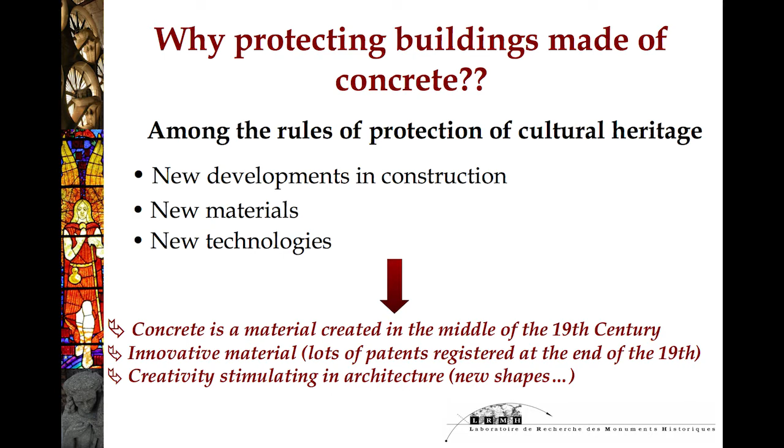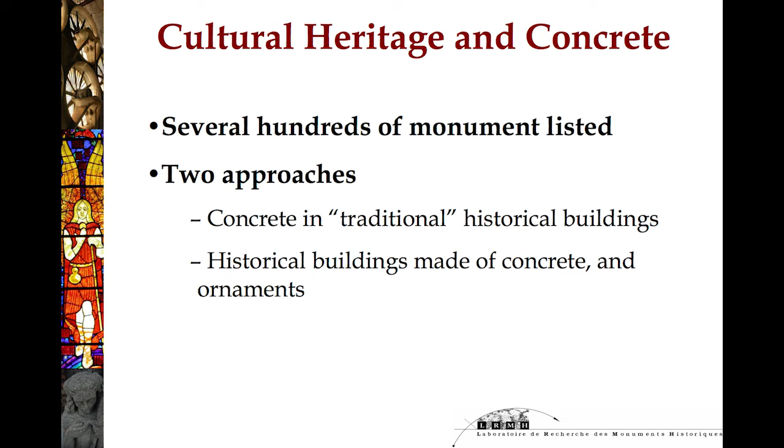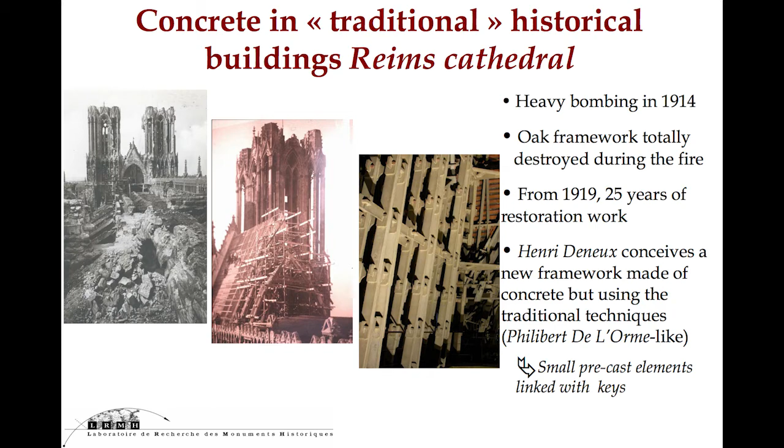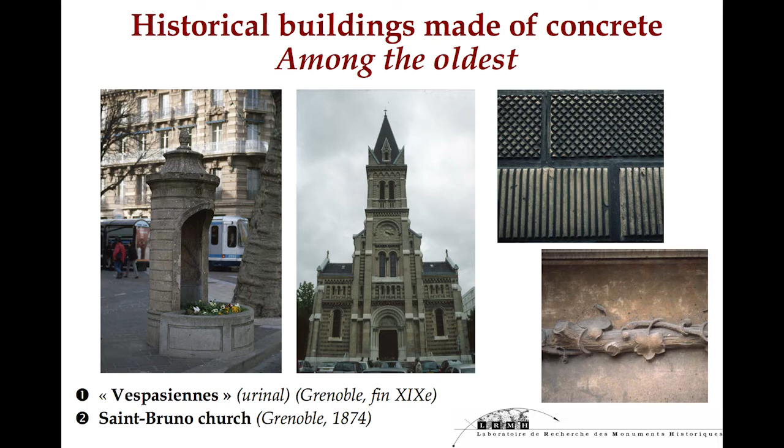Concerning historical buildings made of concrete, among the oldest are many examples in the Rhône-Alpes region, but this concrete is in fact without reinforcement. It's cast stone made of natural cement, so without reinforcement. We can see here an example with a repetitive geometrical motif, where natural cement was used to mold ornaments like flowers and branches. A funny example is the Vespasienne, urinals in Grenoble, made with cast stone.

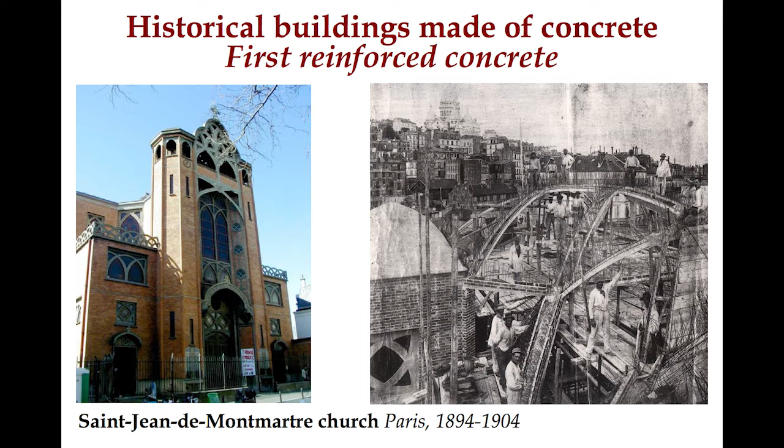The first reinforced concrete: you can see here a picture of the construction of Saint-Jean-de-Montmartre Church, near the Sacré-Cœur in Paris. The building system used here, in France, is called coffrage perdu, or lost formwork, in bricks. You can see here the formworks in bricks. The brick formwork is kept after the hardening of the concrete, so the brick formwork is always present in the building.

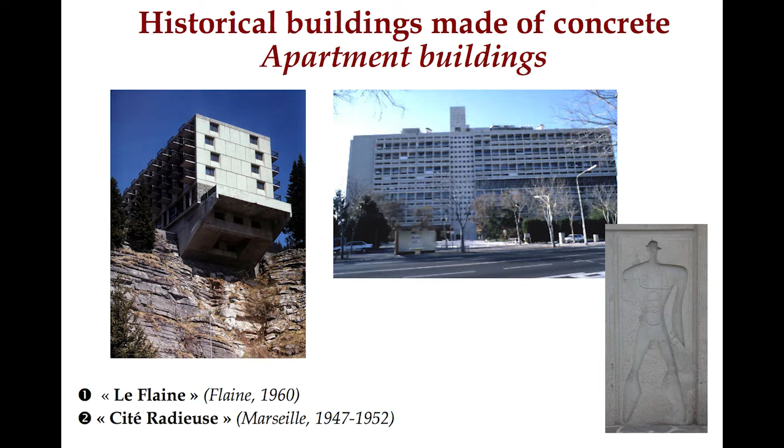Concerning historical buildings made of concrete, there are many types. There are apartment buildings - you can see two examples here with Le Flaine, the ski station in the Alps mountains, and the famous Cité Radieuse in Marseille by Le Corbusier.

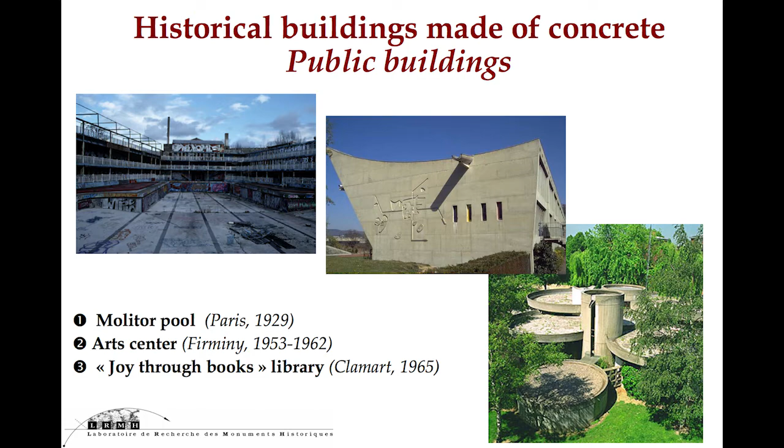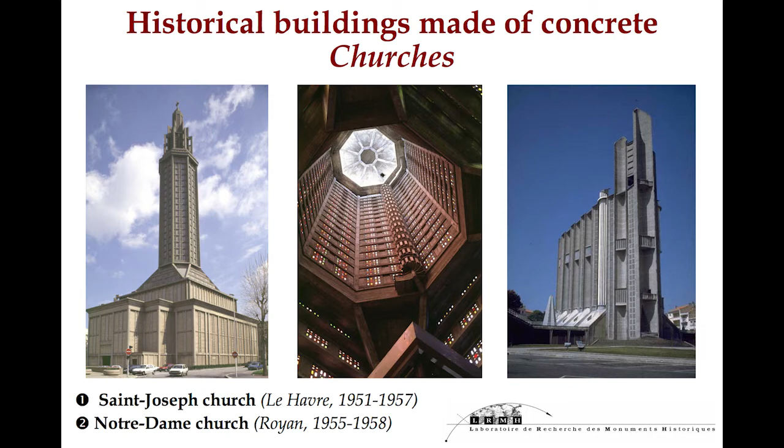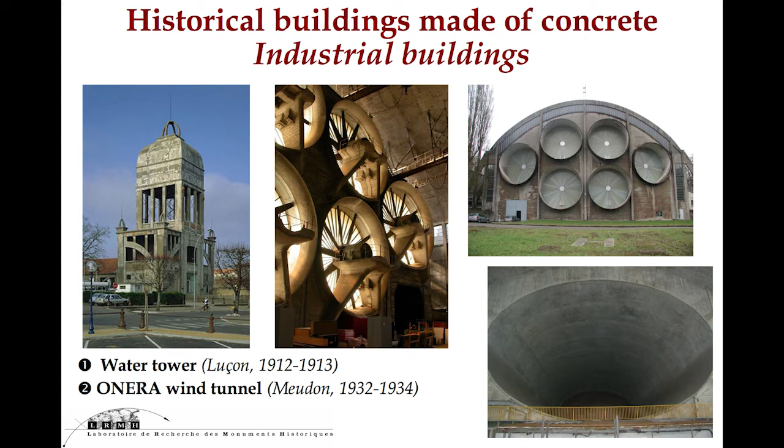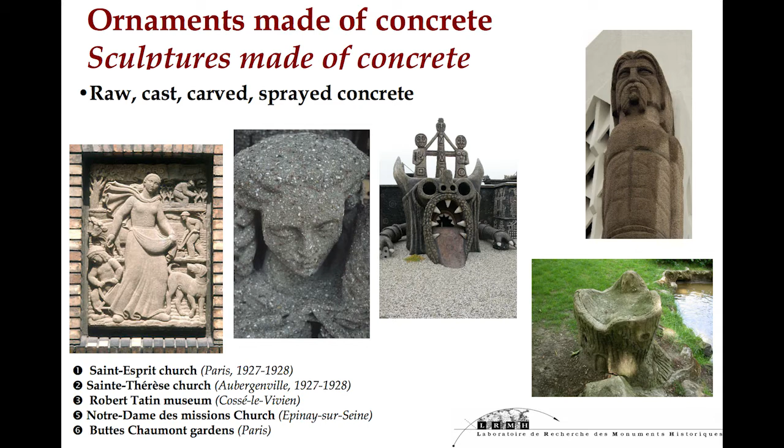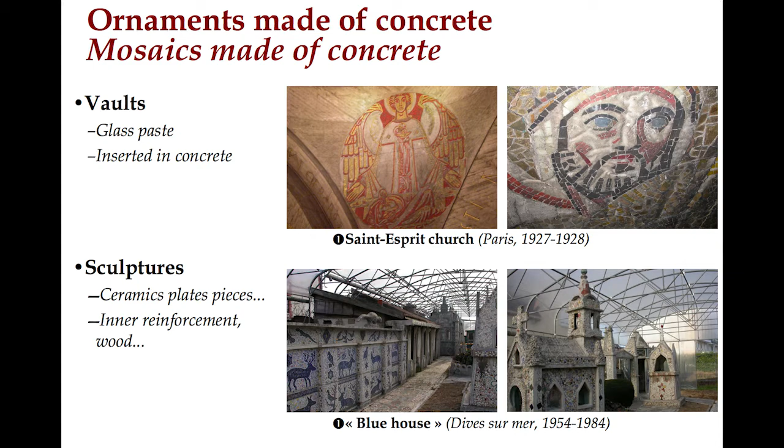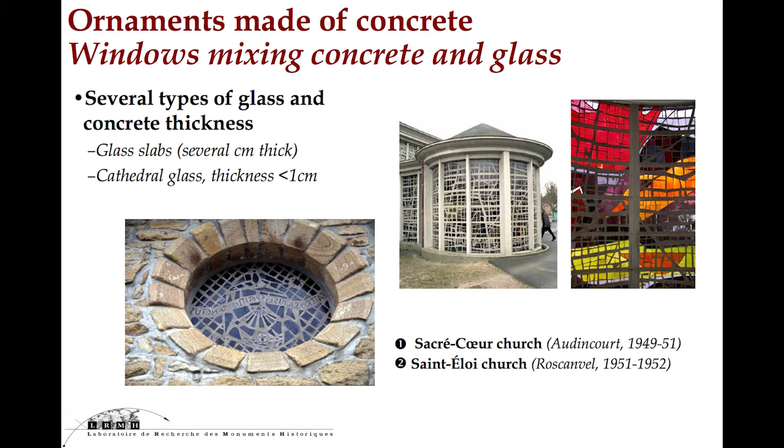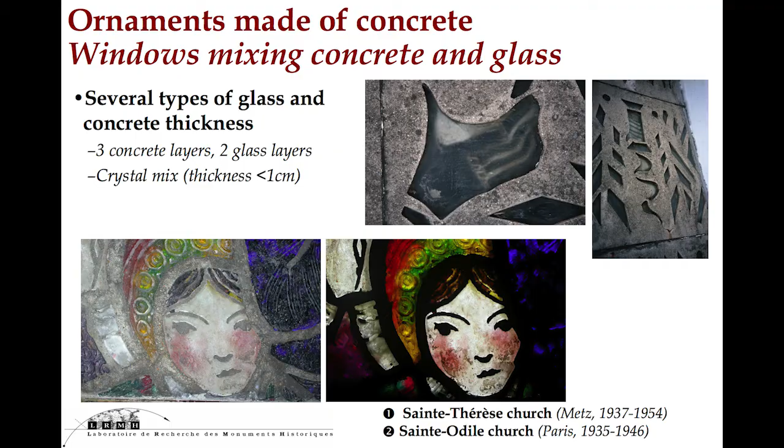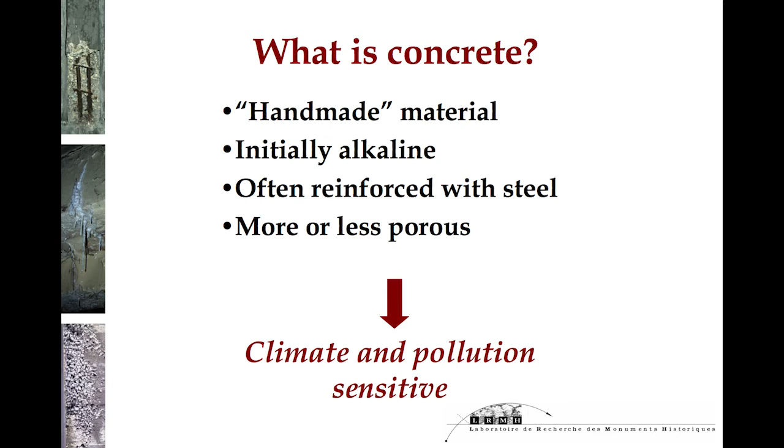So let's talk about the main decay mechanisms identified on this site. First, what is concrete? It's a handmade material which is initially alkaline. It is often reinforced with steel, and it is more or less porous. So concrete is climate and pollution sensitive.

The decay's origins are mainly the composition and casting, the lack of maintenance, the natural aging, and the aggressive environment. Concerning these last two, natural aging and aggressive environment, there are six main mechanisms: erosion and leaching, carbonation, chloride-induced corrosion, sulfate reaction, freeze-thaw sensitivity, and alkali aggregate reaction.

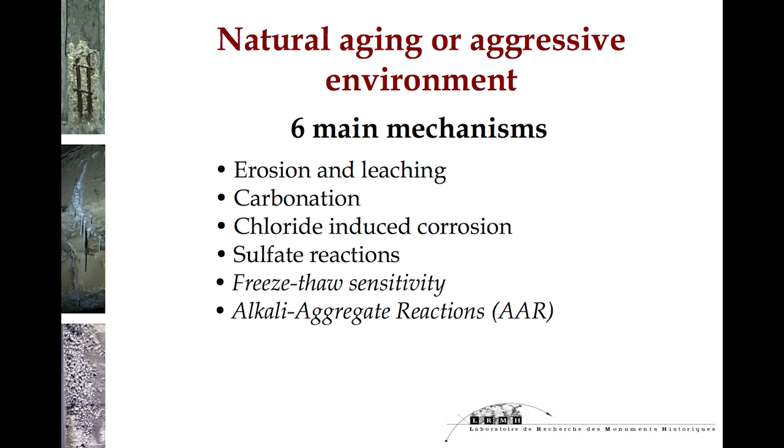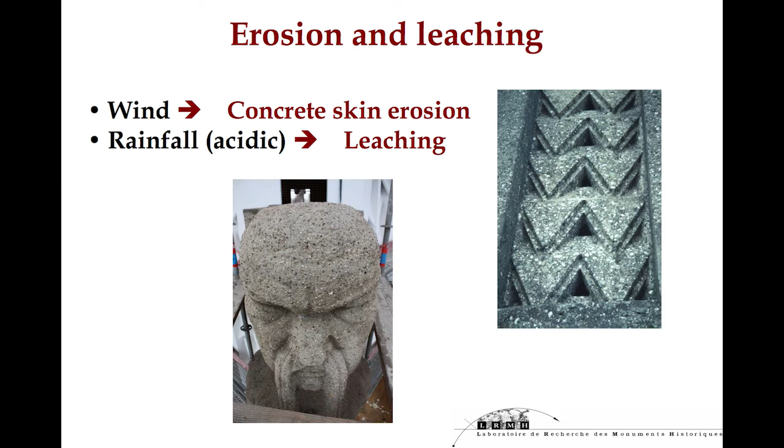I'm going to present you the first mechanism. Concerning erosion and leaching, the wind leads to concrete skin erosion, and the rainfall, which can be acidic, can lead to a leaching of the concrete skin. As you can see in this picture, the concrete skin is removed, and we can see now the aggregate.

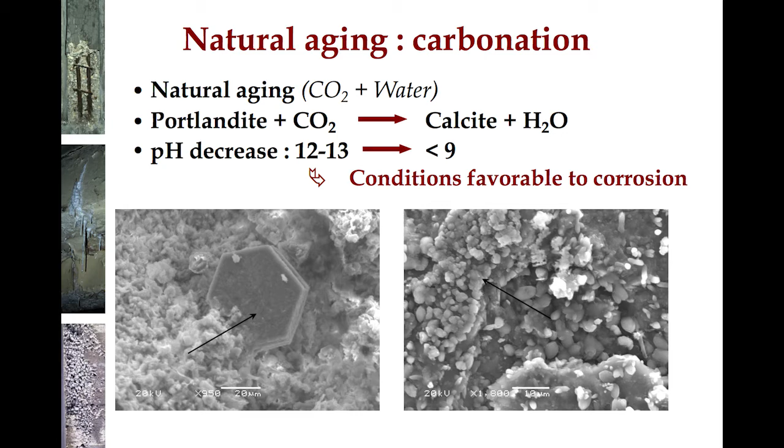During this reaction, we have a pH decrease from 12-13 to a pH value lower than 9, and these conditions are favorable to corrosion. So carbonation leads to generalized corrosion. It depends on the rebar's position in relation to the carbonation front, and the CO2 diffusion follows the first law of Fick's flow, according to time. In terms of decay, we observe concrete heaving, scaling, and spalling.

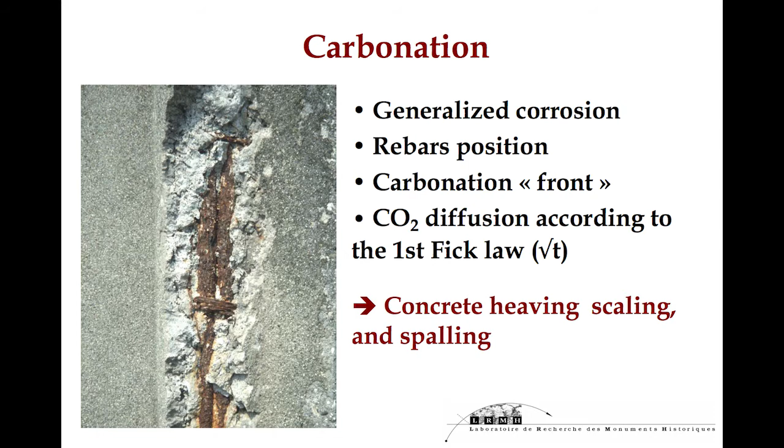Concerning chloride-induced corrosion, there are many chloride sources: chloride-containing admixtures, seawater with sea sprays, de-icing salts, and household waste incinerators. When free chlorides reach the rebars, there is an increase of standard corrosion. Chlorides are a catalyst for standard corrosion, and when there is a high concentration of free chloride, the passive layer of the steel is attacked, causing pitting. So the main decays are concrete heaving, scaling, and spalling, and there are specific rust stains.

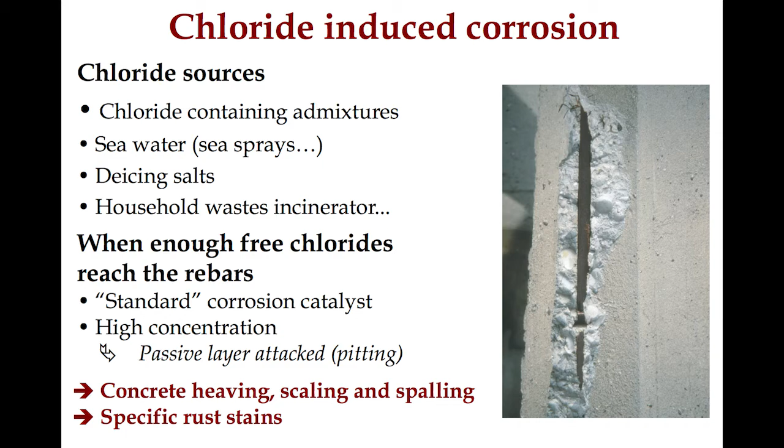Now the sulfate reaction - there are two sulfate reactions. The first is the formation of black dirt deposits. The calcite, given by carbonation, reacts with sulfate in air to give gypsum. Gypsum is white. The gypsum reacts with aeolian particles, which are black, to give black dirt deposit. You can see here gypsum crystal and fly ash particle.

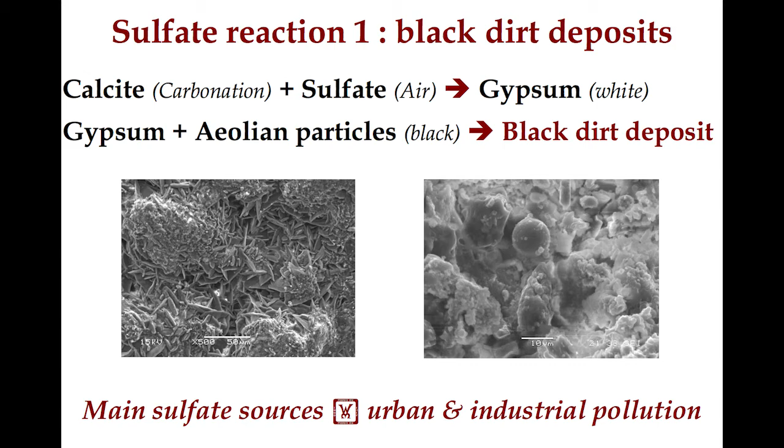The main sulfate sources are urban and industrial pollution. The second sulfate reaction is the formation of secondary ettringite. Aluminate-enriched concrete plus high sulfate contents give the formation of secondary ettringite.

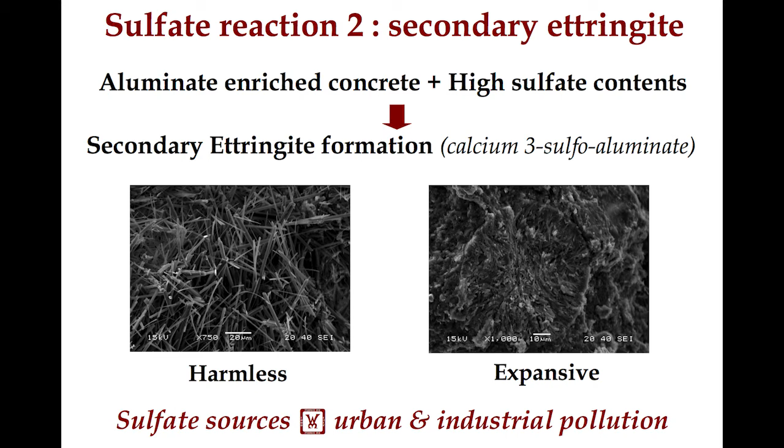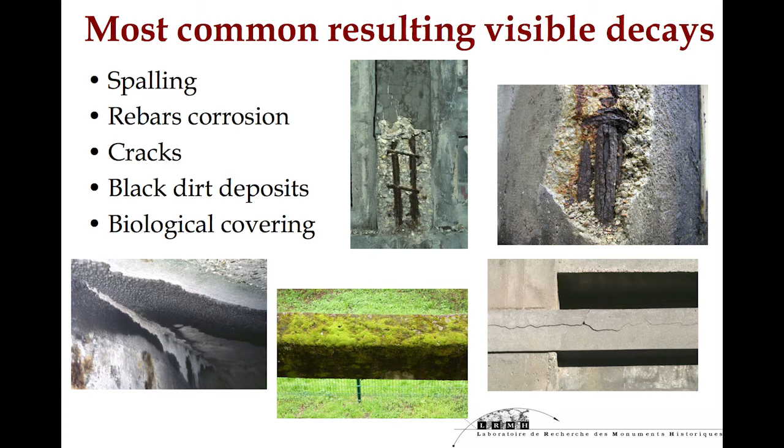So we can sum up the most common resulting visible decay: spalling, rebar corrosion, cracks, black dirt deposits, and biological covering. You can recognize these in these pictures.

I'm going to present to you now the LRMH research axes based on these observations. Concerning diagnosis and corrosion diagnosis, we perform many internal, national, and European projects to work on electrochemical techniques, for example, to measure corrosion speed and resistivity. We worked on acoustic emissions to detect corrosion, and we worked too with techniques to measure moisture content.

Concerning ancient cement identification, we performed internal and European projects, and we developed a specific protocol to identify ancient cements, particularly natural cements.

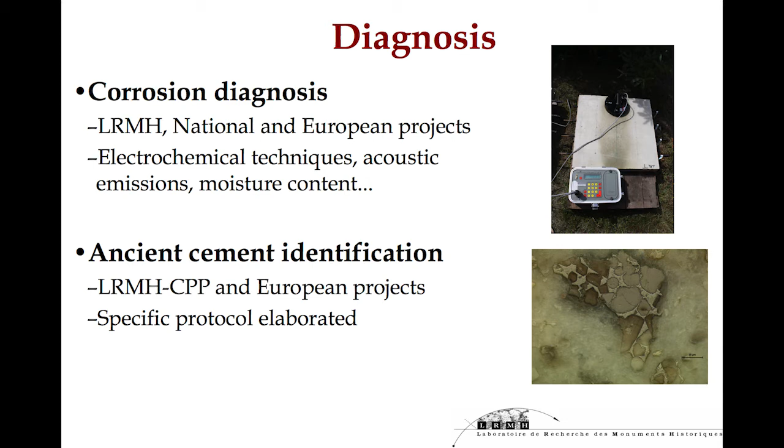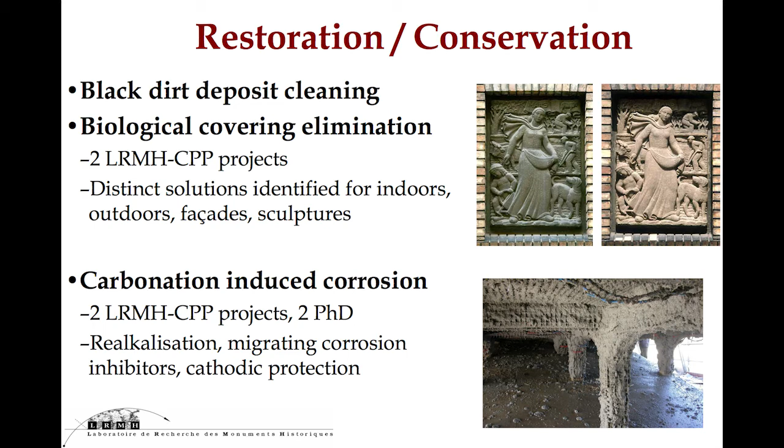Concerning carbonation-induced corrosion, we performed projects on realkalization, migrating corrosion inhibitors, and cathodic protection. For chloride-induced corrosion, we are going to start a PhD with Laboratoire Central des Ponts et Chaussées in France for the electrochemical extraction of free chlorides. And for erosion and leaching, we're going to start an internal project on biological consolidation and chemical consolidation.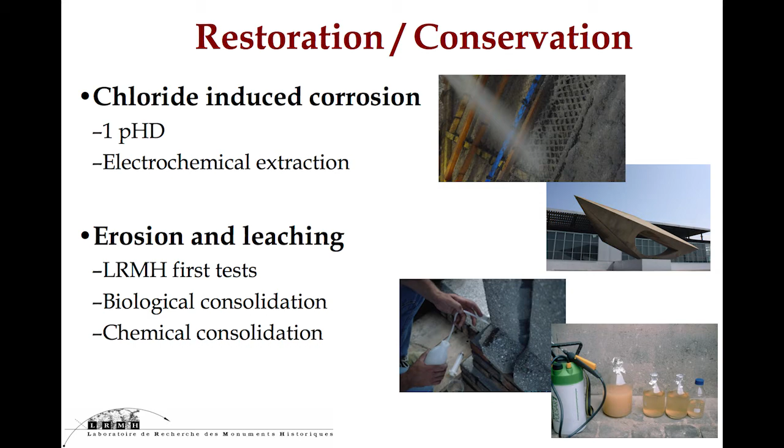I'm going to present the restoration strategies and examples. The restoration strategy has 3 steps: first, diagnosis with a six-step protocol elaborated; second, cleaning black dirt deposits and biological covering; and third, specific treatments like corrosion treatments or patch repairs.

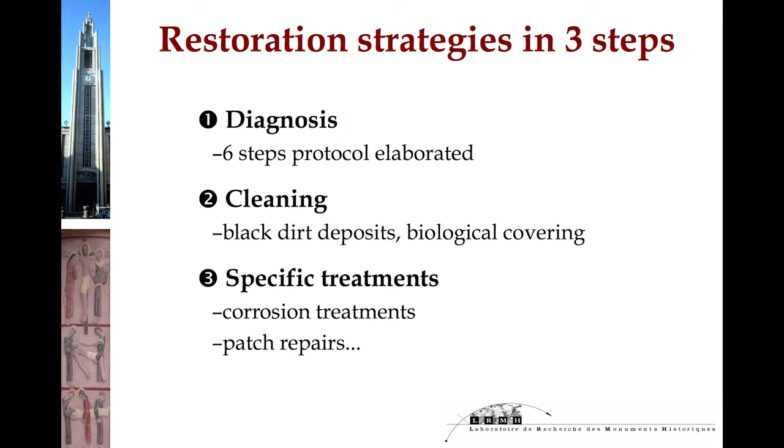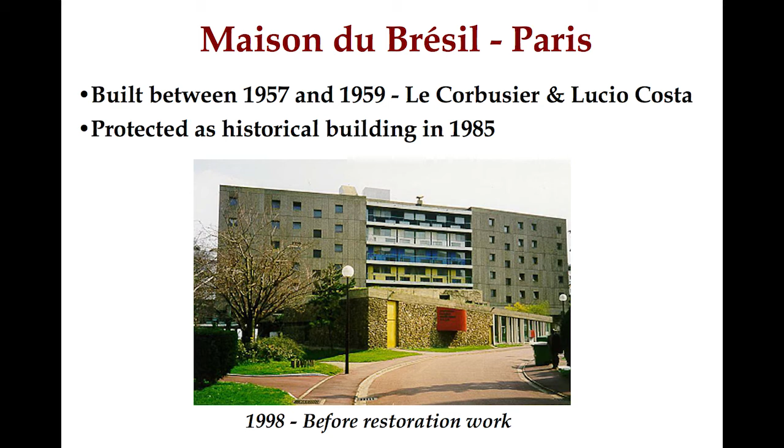I'm going to show you 2 examples. The first is Maison du Brésil in Cité Universitaire in Paris. This building was built between 1957 and 1959 by Le Corbusier and Lucio Costa. It was protected as a historical building in 1985, then closed in 1995 for safety reasons, such as electricity issues.

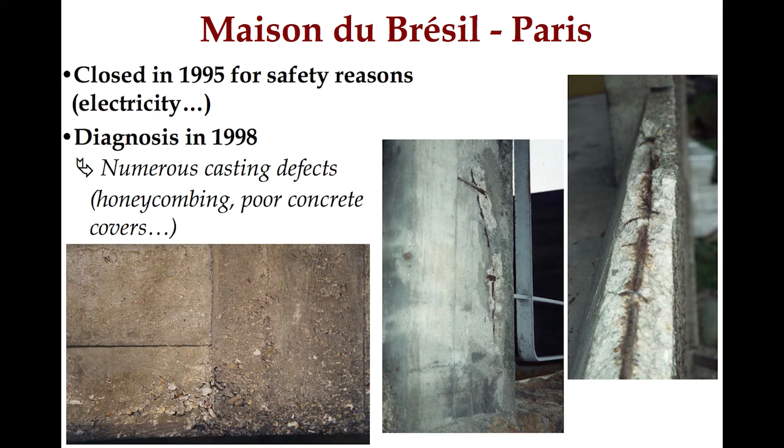The diagnosis in 1998 showed numerous casting defects, like honeycombing, and poor concrete cover, as you can see here. The diagnosis showed that the precast panel was carbonated on the inner face up to 40 millimeters, and the aggregates were AAR sensitive.

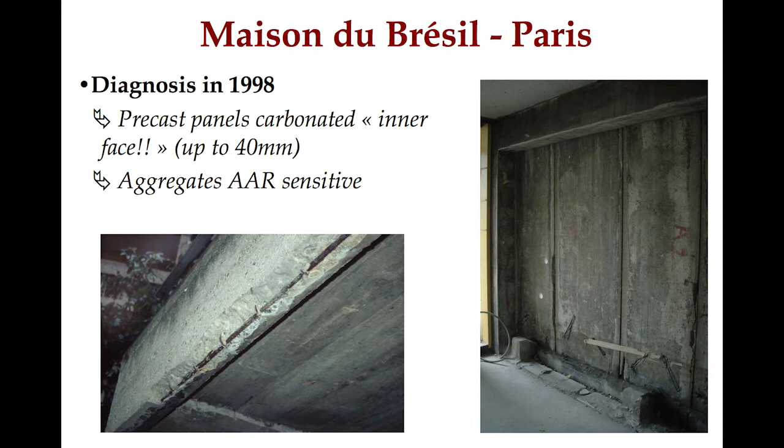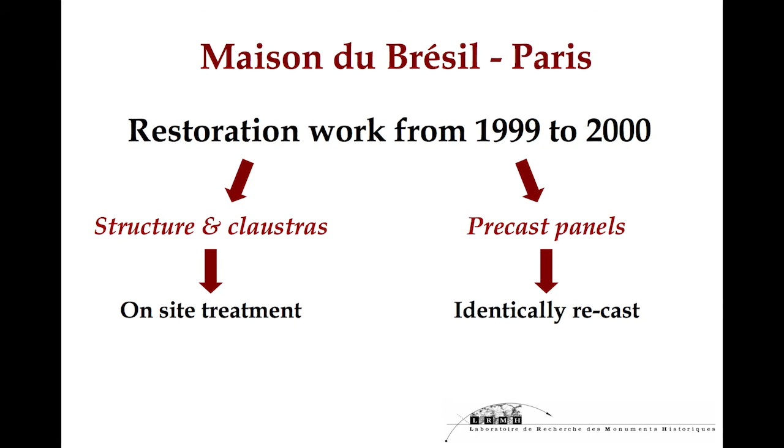Concerning the restoration work, it was performed from 1999 to 2000. For the structure and claustra, there was on-site treatment, and for the precast panels, they were identically recast. For the structure and claustra, cleaning was performed using abrasive projection and Nettwork wet projection, as you can see here, and patch repair with cement-based mortar was realized.

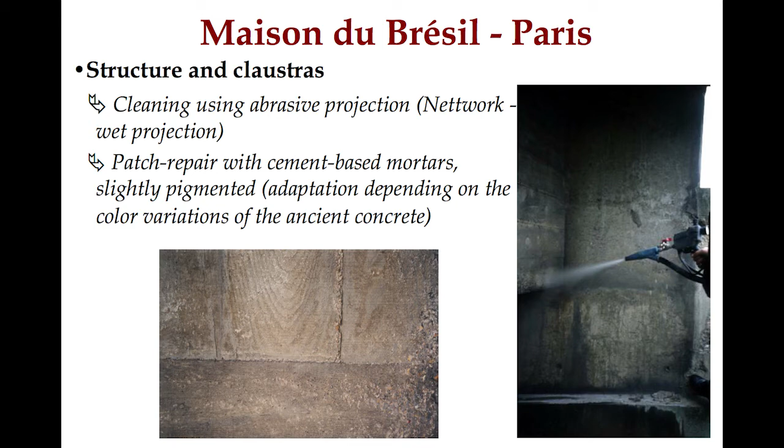This mortar was slightly pigmented and adapted depending on the color variation of the ancient concrete. Always for the structure and claustra, there was a reproduction of the Le Corbusier color, as you can see here.

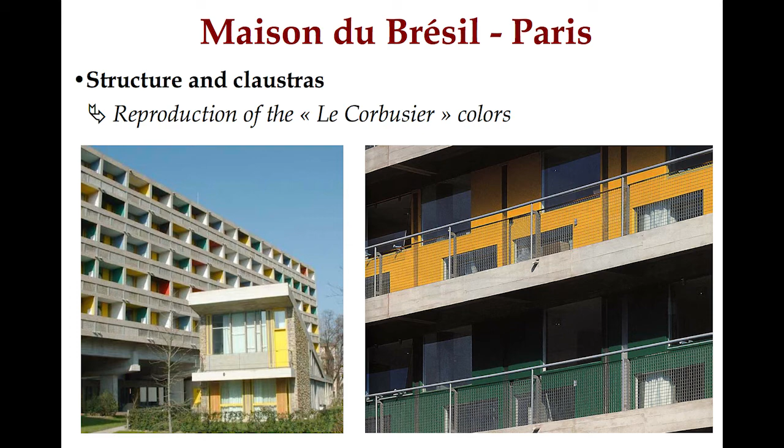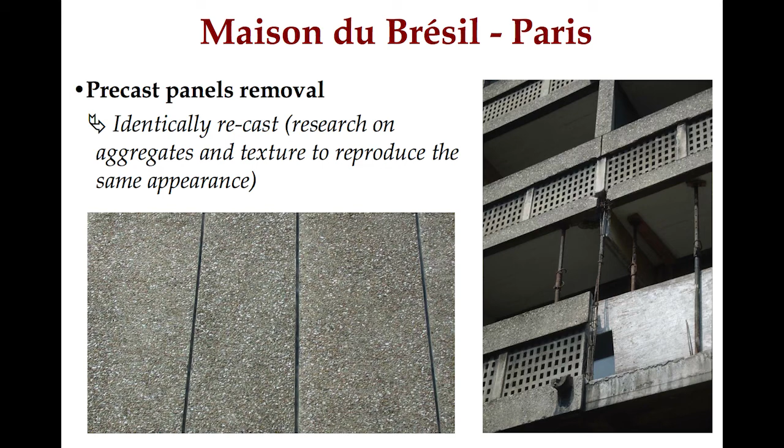For the precast panels, there was removal and identical recasting, with research on aggregates and texture to reproduce the same appearance. In the north wall, there was an experimental treatment using a migrating corrosion inhibitor, applied for panels and portico, plus balcony nose on the western facade.

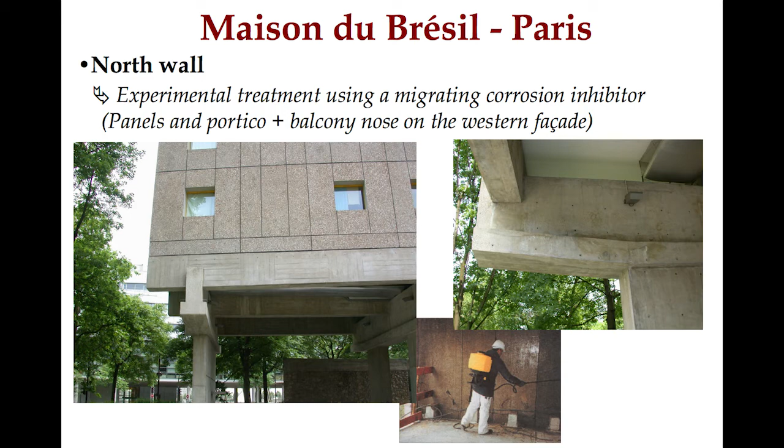You can see here the results before and after the restoration. In 2013, there is very good durability of the restoration.

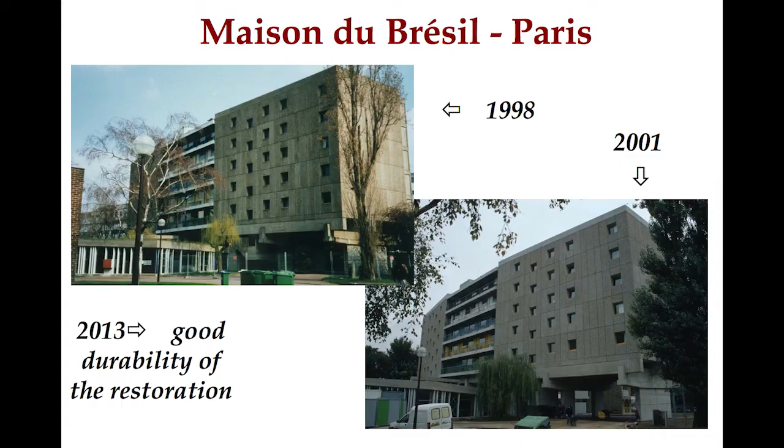Second example: Saint Lazare Church in Lèves. This church was totally destroyed during the Second World War and rebuilt between 1952 and 1956. It was listed in 2002, and the bas-reliefs were made of polychromatic concrete, as you can see here, by Jean Lambert-Rucki.

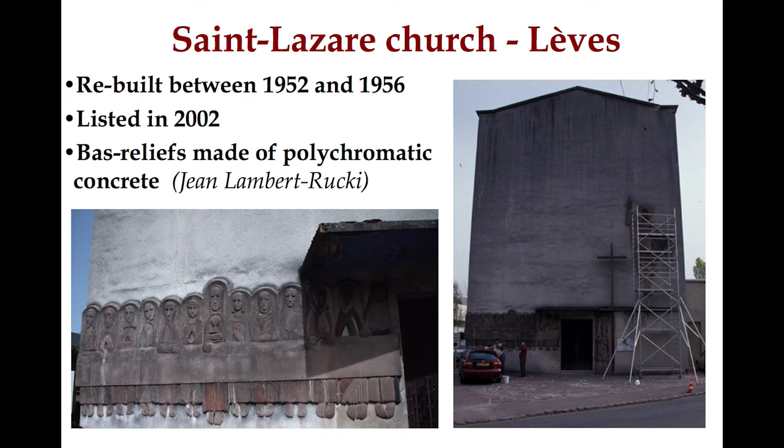Concerning the visible decays of this bas-relief, we observed bas-relief detachments, cracks, and white concretions. We observed numerous spalling, here, and here, and here. We also observed black dirt deposits and biological covering.

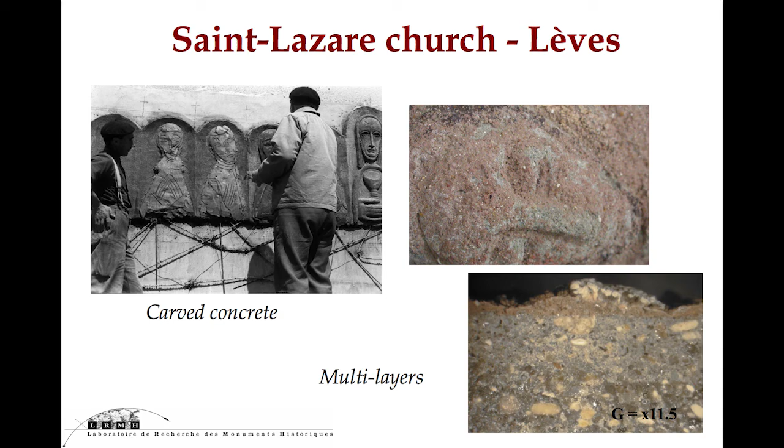We observed polychromy disappearing in two areas. Where the bas-relief was unprotected, the polychromy loss occurred; where it was protected, the polychromy was preserved. It was carved concrete—you can see here the artist working with multi-layer concrete.

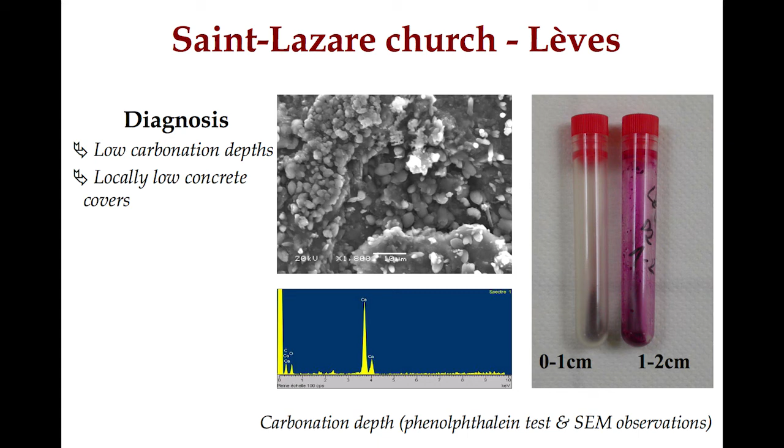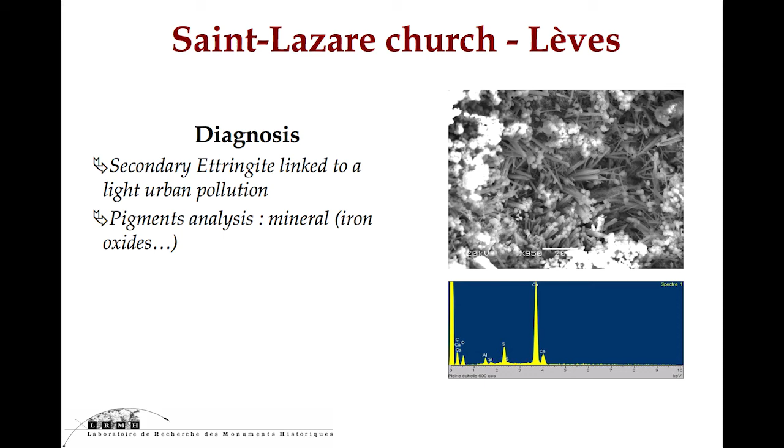The diagnosis showed low carbonation depths with locally low concrete covers. The diagnosis also showed secondary ettringite linked to light urban pollution, and the pigments were mineral, mainly iron oxides.

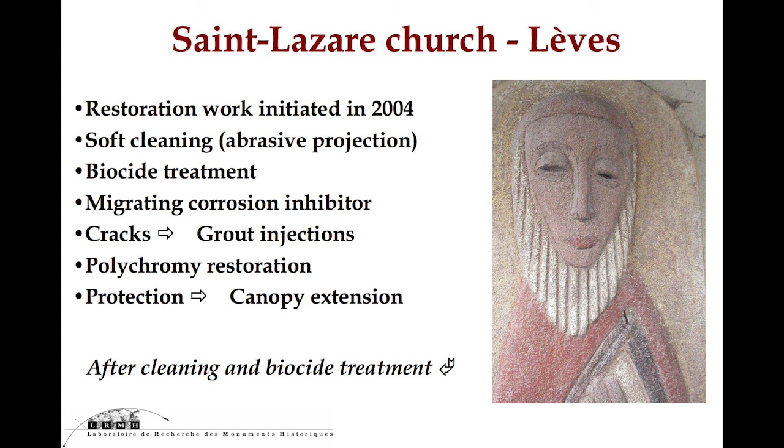You can see here the result after cleaning and biocide treatment, and a picture before restoration and after restoration with the canopy, along with the other results on the entire facade.

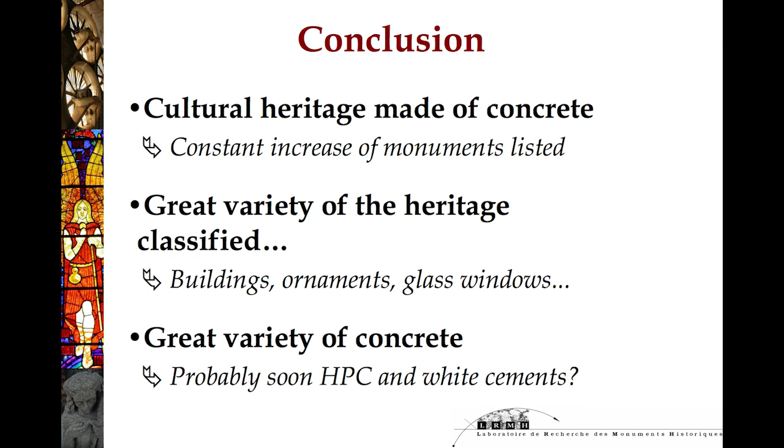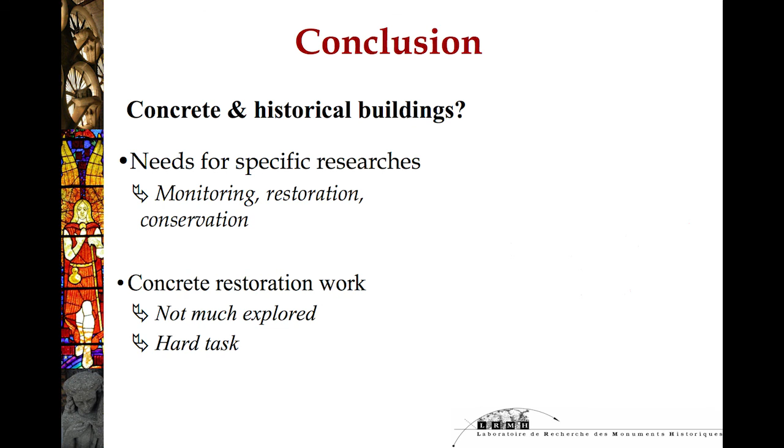In conclusion, there is a constant increase of monuments listed as cultural heritage made of concrete. There is a great variety of heritage classified: buildings, ornaments, glass windows, and a great variety of concrete, probably soon including high performance concrete and white cement. For concrete historical buildings, there are needs for specific research in monitoring, restoration, and conservation. For concrete restoration works, this has not been much explored—it's a hard task.

Thank you for your kind attention.